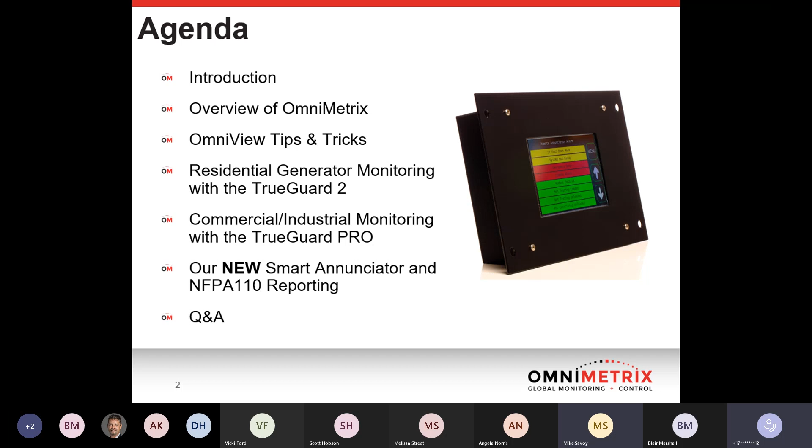Thank you, Jesse. And just kind of an overview of who we are, for those of you who don't know or maybe don't know everything. We were founded in 1998, based here in Atlanta, Georgia, and all of our operations are based out of Atlanta, but as Jesse said, I'm remotely located in Louisiana, and I primarily focus on the Texas Gulf Coast states over to Mississippi, Alabama, and everything north, but have customers all over the world, in the Caribbean and Europe and things of that nature. And then I have two other counterparts that focus primarily on the east and western parts of the U.S. But we have three different divisions.

We initially started with power generation, and then we took a few segues into doing oil and gas pipeline, cathodic protection monitoring, and even more recently, we do air compressor monitoring as well. We also have the ability to do custom engineering projects. We do a lot of fire pump systems, sprinkler systems, both on golf courses. I have a couple of customers with water pumps on levee systems and things of that nature. So pretty much anything with a control panel, we can monitor, tap into it, and get you the data that you need readily available.

So what I'm going to do now is do an overview of our OmniView system. That's the online portal where you can set up and manage the generator monitor units, and I'll do an overview of that so you can see it. Some of you, this may be the first time. Some have probably been using it for years, but I've got a few other tips and tricks that might be something new for you to learn today. So happy to do that.

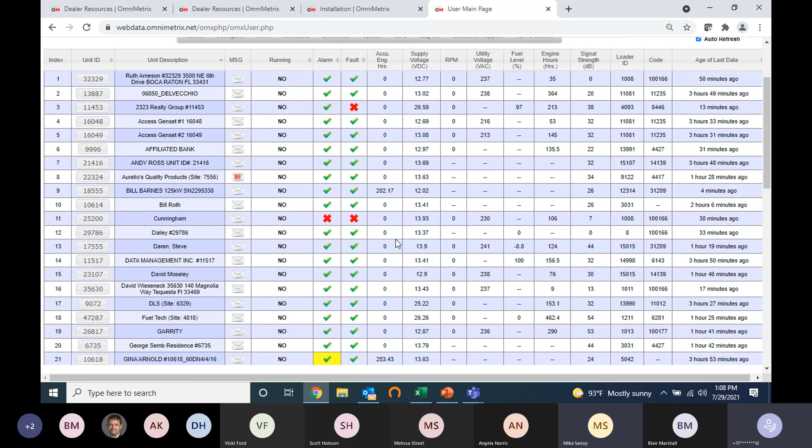So whenever you log in, this is just a demo page that we have here internally, but these are live units that are spread across the U.S. The default is to show 10 units, but as you can see on this page, there's 57 total. So if you wanted to, with this drop down, you can go to 25, 50, 100, 500, or just hit all, and that'll display all of your units on your home landing page. So you can get a snapshot of every single one of your generator monitors, and green is good, red is not good. And on this page, you can click the red X if you wanted to see what's going on, or you can go into that individual unit if you wish to do so.

But in this case, for this generator, the battery voltage is outside of the parameters. So we have a low of 9 and a high of 15, and its last registry from today shows it's at 26.5. So something's going on with that battery, and chances are it's going to create a failure to start at the next exercise, or if there were to be a power outage.

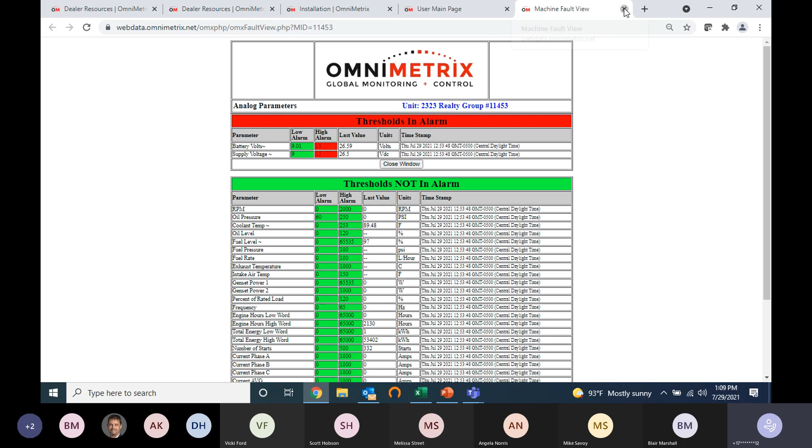The weather is fine. There's no hurricanes in the Gulf or the Atlantic. So it might be something that when you have a tech that's routed to be in that territory on Monday, you can have them swing by and check on that. If it was a battery, whatever the case may be, you know what type of generator it is, and bring a battery with you, and then be able to make that change on one stop, rather than go out there immediately, not knowing what the problem is. Perhaps you don't know what generator is there, but through our system, you've already input all that data, so you know everything there is to know about it and what exactly is the issue.

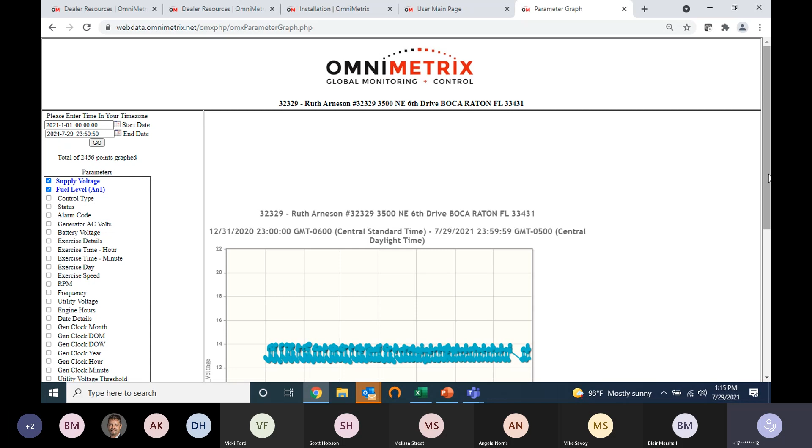We keep it on file, accessible for you to pull like this for 2 years. If you need something to go back even further than that, we'll be able to give you access to that. But typically, if it's older than 2 years, it's really not going to have a whole lot of information available to you now, how it's going to be pertinent.

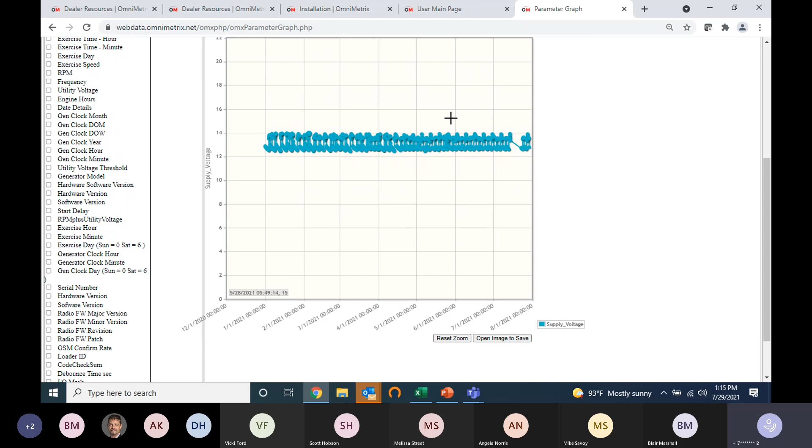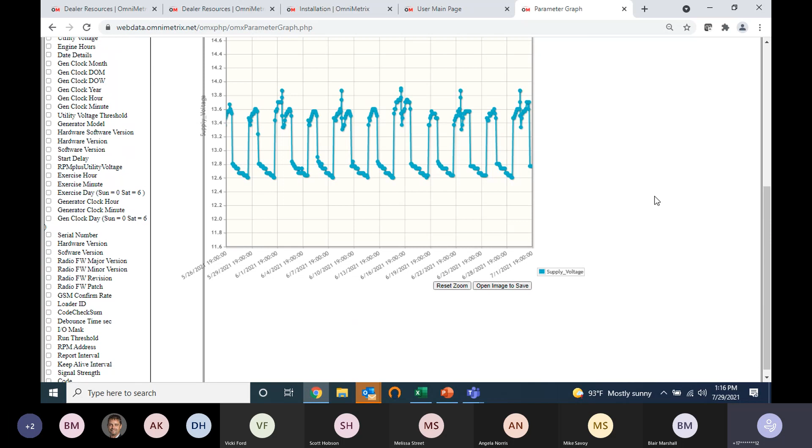So over the course of this year, it's been very consistent on how this battery's performed. There's been no highs or lows in here. If we wanted to, we can just kind of zoom in and look at a particular time. And each one of these dots is a timestamp of one of those 3-hour windows. So this information is here for you. And as I said, you can open it to save, and either print it out or save it to your PC and then email it, whatever you wish to do.

And then we've found with several customers, I know that batteries, depending on what part of the country you're in or what brand you have, 2 to 3 years is the life cycle of it. But if you have this information available, and you can make a very good assumption that the trajectory of that is showing that battery is not going to last much longer,

then you have this to prove to your customer that, hey, it may be a good time to replace that battery now while we're going to be in the area doing our biannual service call anyhow, to save you a trip charge, because we don't feel very confident it's going to make it another 6 months when we're going to be back out there again. So just an example of how you can use this to help you and your customers out, keep those truck rolls at a minimum, and make everybody much more efficient.

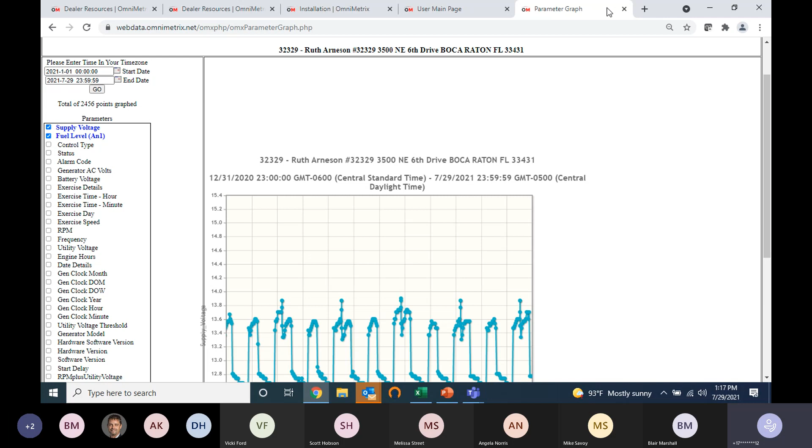So as you can see, as of 55 minutes ago, everything is looking good with this generator. I know it just shows a few items here on the screen, but you can always click on the check marks in the default, and it gives you all the parameters. So as we said, supply voltage, we set the defaults for 9 and 16, but the last value of this one is 12.77, so that's why it's green. We're within that parameter.

Same thing, let's say utility voltage, 200 and 330. So as of 55 minutes ago, it was at 237. So all these things are here. We set up the defaults automatically when we activate the monitor, so there's nothing that you ever have to do. That's all done internally when we download the software at the point of activation.

But if for some given reason you wanted the high alarm on the battery to be at 14 instead of 16, then we could do that. Just let us know. Just bear in mind that that's gonna make the alarms go off a little bit more frequently, but we definitely recommend keeping the parameters as we have set them for you.

The unit description is one of the things that we do when we set it up. It can be changed at any time in the future. Let's say you move the monitor, or the home is sold. That's a common one, and then the new homeowner wants to continue with the monitoring already. So you could keep the address the same, but change the name on it. And that's done by configure and then edit monitor.

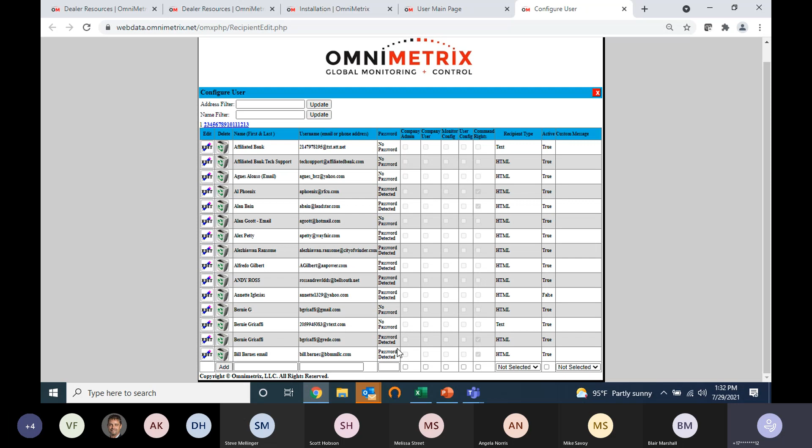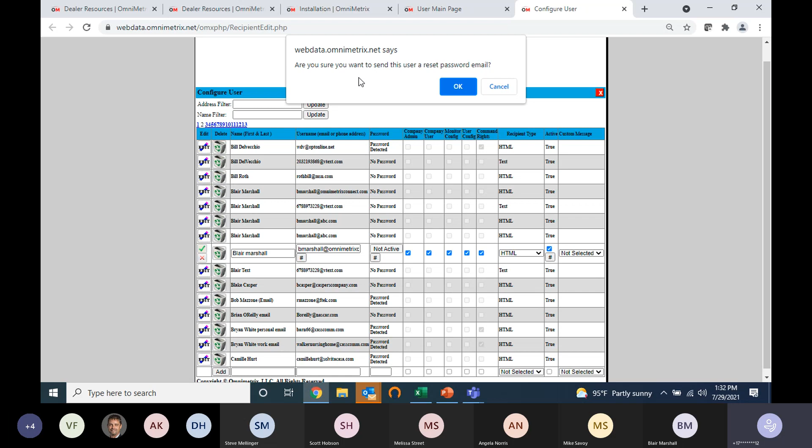So in this case, let's just say I work for your company. We're going to click all these, HTML, active, and hit add. And because we didn't put a password in there, I don't have to use a password to log in. But let me go to that page where I'm at. So it says no password. We're going to edit it. And it says not active. If I hit that, it says, do you want to send a password reset email? And you'll hit OK, and I'll get a link to set up my own password at that point.

All right. So anytime you would want a more in-depth overview of any of these items, we're happy to help out. You can reach out to any of your regional sales managers, or send us an email. We have some training documents if you've gotten them before, maybe lost them, or want a refresher on it, we can send that out. It's definitely helpful. There are screenshots, it walks you through step by step, and can help you do all of these things.

All right, so I'm going to go back to our PowerPoint and talk about our residential monitor, the TrueGuard 2. It works just like any of our products, across all carrier brands and controller models. We currently use 4G LTE. Our default is to use AT&T, but Verizon is a backup if for some reason there's just no AT&T in that area.

LTE has been committed to by each of those carriers until the year 2030. So all of our current monitors and the ones we've sold in the last 6 years or so are LTE, and will be working at least till then, if not even further out, if the carriers decide to keep that network up and running. There are 4 alarm inputs, an analog input and 1 relay output. We work on both the Nexus Evolution, anything that's hardwired, or Modbus 232/485.

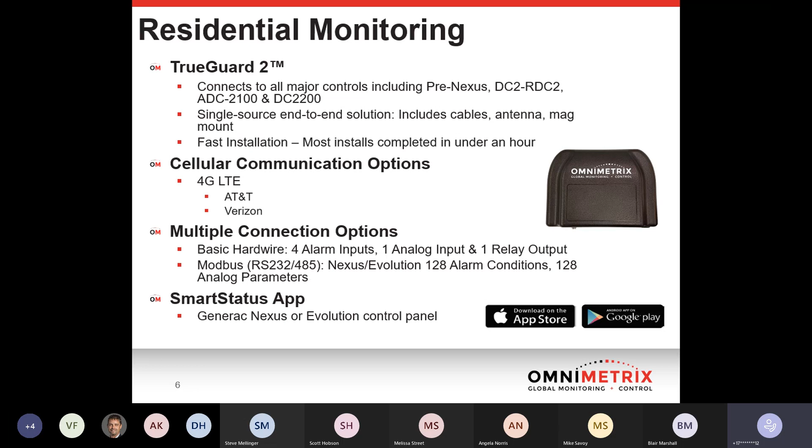And the TrueGuard Pro is our commercial industrial monitor. A little bit hardier design, larger, has 4 magnets on it to make it even more stable than the TrueGuard 2. And that's the beauty of all of our products. They're magnetic mounts, so there's no drilling into anything.

All you have to do is find a nice hardy piece of metal inside of the housing unit of the generator, stick it to it, and run the antenna outside, usually outside of one of the exhaust vents, and then connect directly into the controller via the provided wiring harness.

So the TrueGuard Pro works on single systems. You can also use one TrueGuard Pro monitor to work on an MPS system. So if you have 2, 3, or even more generators that are paralleled together, it only takes one of our monitors to work, and then we can distinguish which one of those generators is in alarm by just using one monitor. We also have a mobile solution.

So if you have a mobile fleet, we have the ability to do asset tracking for you, set up geofences, get alerts when the generator is moving, and breadcrumb trails, all that important stuff, so you know where that asset is and it's not walking off a yard or off a customer site without your knowledge.

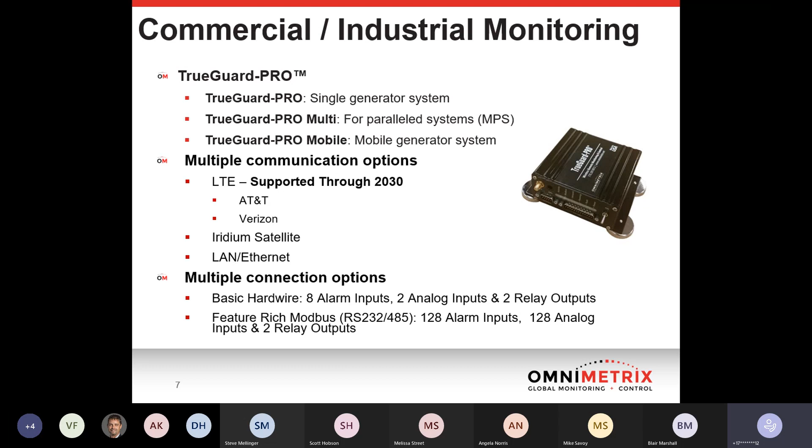And just launched last year, we have a Smart Annunciator. So it's a color display touchscreen annunciator that has our monitoring built into it. So this would take the place of a TrueGuard Pro. So primarily in healthcare, in particular, they use annunciators, but this could take the place of the old, dumb annunciators. It's just a series of lights that really, unless you know how to read it, don't tell you anything.

On the screen, it'll tell you that there is low battery voltage or missed exercise, and to call Joe's Generators at 1-800-123-45678, whatever you wanted that to say. And again, to remain consistent with OmniView, green is good, and then there's red and yellow that are not good. And you could touch on each one of those and it tells you specifically what it is.

So if it's a battery alarm, you can click on it and it'll tell you that the battery's at 8 volts, and they can tell you what's going on at that nurse's station if need be. But you also get the email and text alerts to tell you the same thing, or you can log into OmniView and see that. So it's kind of a best of both worlds, good, better, best.

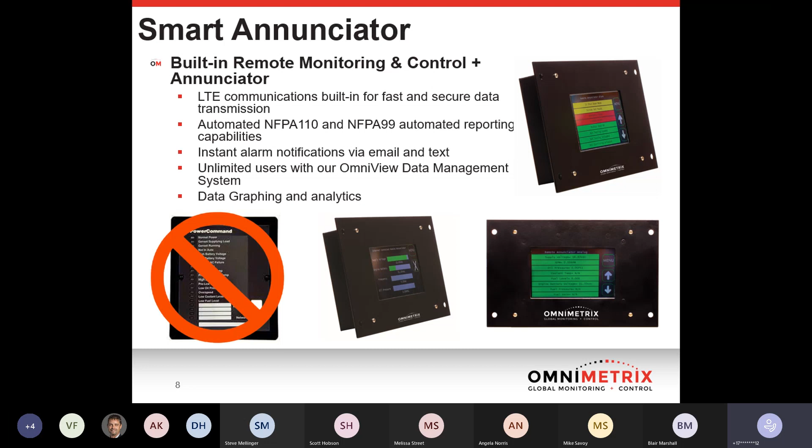And customers, particularly in healthcare, have to have an annunciator to be NFPA compliant, and we have the ability to meet those needs. So it connects to any controller that's Modbus 232 or 485. It has to be Modbus because per NFPA guidelines, that's a requirement. So we don't connect our Smart Annunciator to anything other than Modbus.

And like I said, we can customize it, and just like our other TrueGuard products, there's no software to download. You install it exactly the same way that you do within OmniView, and customize it. You can add unlimited recipients, email, text, just like you can with any of the other TrueGuard products.

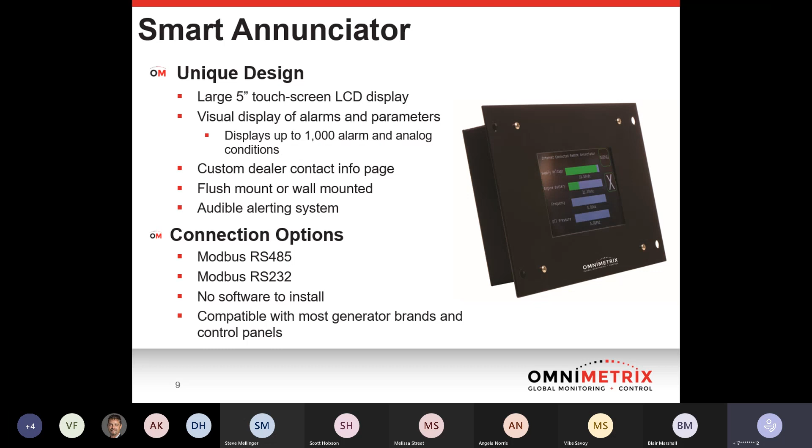We have 2 options. You can mount it flush in the wall to where it's recessed inside of the wall, or you can have it wall mounted where it's like a picture frame that's hanging on the wall. So whatever your preference is, just specify at the time of order, and we can send that out as needed.

So pricing on it: if for some reason you just wanted to have the unit itself without the monitoring, the cost of the hardware is $1,299. But 95% plus of these that we're selling, they're going with the enterprise package, where it includes the monitoring and the NFPA automated reporting. So we can customize and set it up to where you and your customer can receive a weekly email that's NFPA compliant on the results of the weekly exercise.

So there's no longer the need for somebody to walk outside with the clipboard and write everything down as it exercises. We do that for you, and it's automated and emailed out to whoever you want to receive that. So in addition to NFPA, we do have the ability to do custom reporting for any other government entity that requires you to do so. So just let us know.

We work a lot with New Jersey, in particular our customers there, where they have clean air days that they're only allowed to exercise on. So we've set up automated reporting to send out to the customer the days that they exercise, and be able to verify with the local EPA agency that they were in fact in compliance by exercising on those clean air days only.

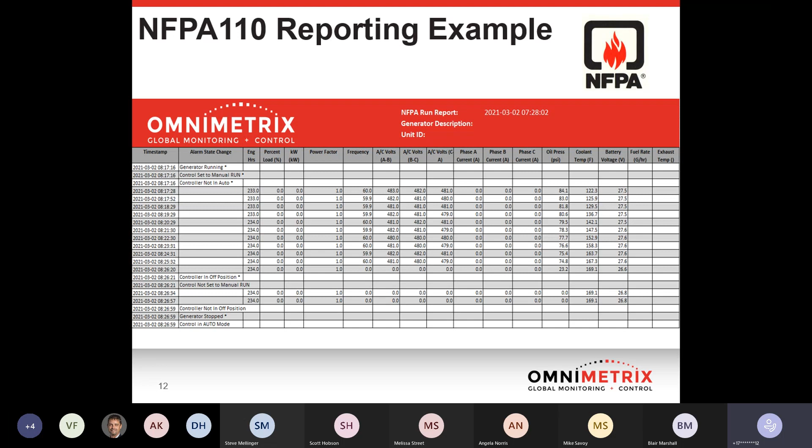Thank you, Blair. As stated before, we definitely wanted to make time to answer any questions that anybody may have, whether about our products, Smart Annunciator, our website OmniView, and how to look at data. So feel free to unmute yourself at this point, or you can also chat with us within the meeting chat if you don't want to speak out loud. But here's your time to ask questions of Blair, the expert himself. So go ahead and fire away.

If you don't know how to unmute, you can always find your name in the list of recipients. On the top, you'll see recipients as an option, and then you can unclick the microphone with the line through it, and that should unmute yourself if you want to ask a question.

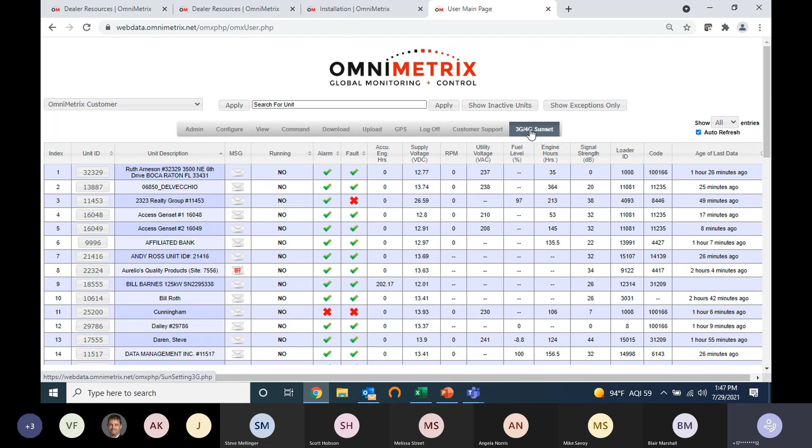And there's also a form provided where you can request a quote for replacement of that unit. Unfortunately, there is an upgrade cost to this. However, done properly, the monitoring renewal date would stay the same as your customer currently has, so there shouldn't be any effect on that. We're trying to make this transition as easy as possible. It's just something to be aware of.

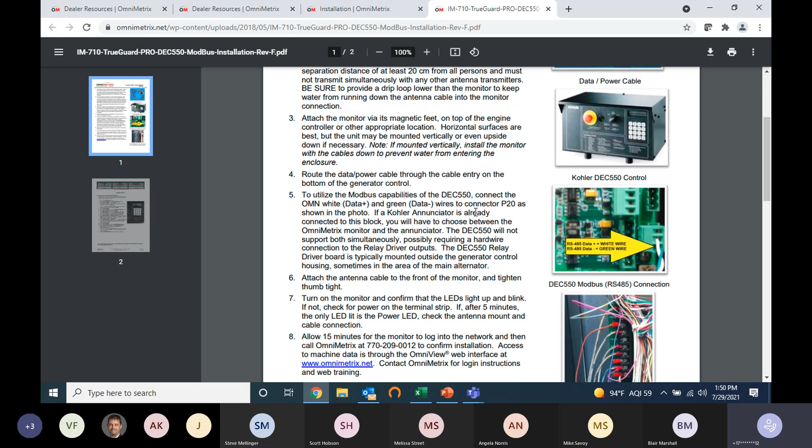Now, we send out the instructions with each one, but let's just say it gets lost, or maybe you initially thought that it was a Cummins, but it ended up being a Kohler, and so you can just come here, find the Kohler DEC550 Modbus, and here you go. Here's the install guide for it, step by step with pictures, and then also down below, the interface guide. It tells you everything that can be monitored with each one of these particular monitors. So if it's a Deep Sea, click on it. This is everything that's readable off of that control panel.